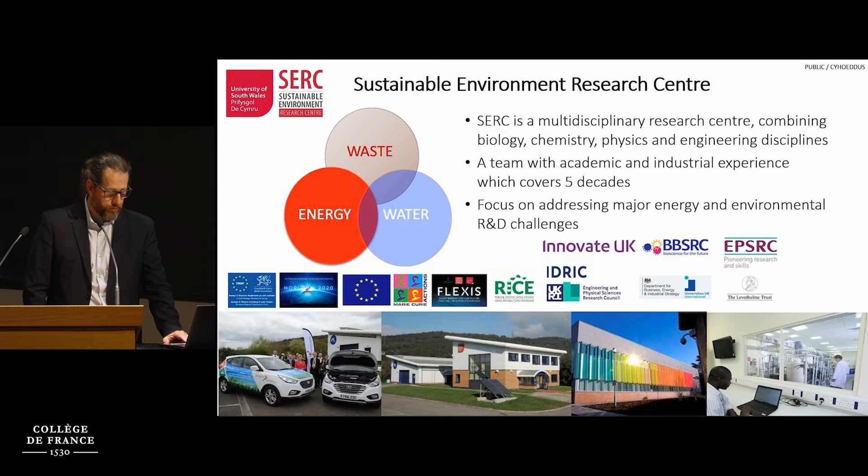We carry out mainly applied research, but we also have a lot of work in the hydrogen area, which I'm going to concentrate on today. And you'll see there we've been very lucky over the years to be funded through the framework programs. So from 1991, and most recently we've just been funded on a program with SNAM, which is entitled H2 Shift, which I will talk about later in my presentation.

Okay, so this is the Hydrogen Research Centre. It's situated at Port Talbot. And this was a fairly unique building. Back in 2008, we built this, and it generated hydrogen from PVs, and we've been refueling vehicles since then.

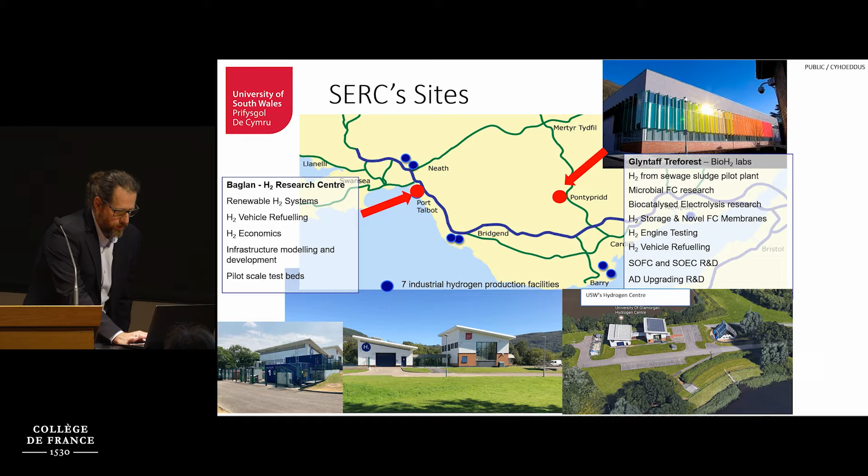It's rather difficult to. Oops.

So today I'm going to talk about the role of hydrogen in a low carbon future, and I'm going to talk about that in the perspective of the region that we're situated, and then in the UK, and some funding opportunities that I think are relevant for our collaboration going forward.

So hydrogen, we know, is the most abundant element in the universe. It's all tied up in molecules, water, hydrocarbon, biomass, so we're going to have to extract this hydrogen from these molecules if we're going to use it. Although recently there's been developments, which I'll talk about right at the end, which may mean that we can actually mine hydrogen in the future.

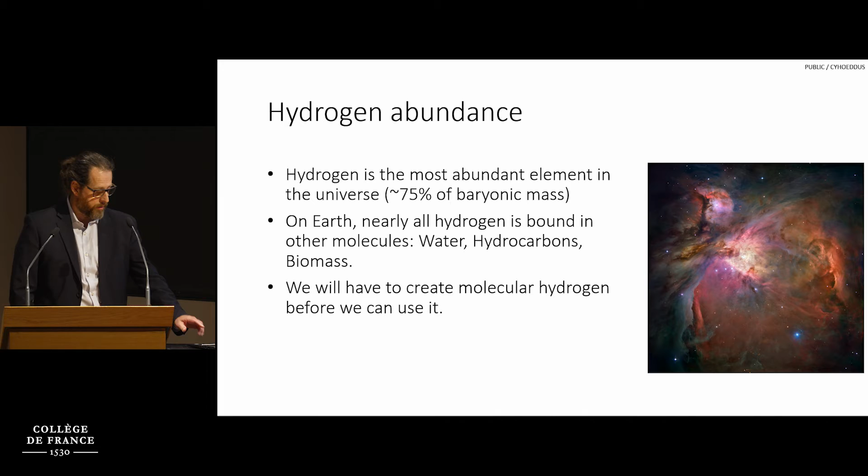And what makes hydrogen a good energy vector? Well, it's got the highest energy content per unit mass of any chemical fuel. It burns and produces no pollution, just water. It's got a heating value that is 3 times greater than any hydrocarbon fuel, and it can be produced from a variety of sources.

We've heard already about nuclear power and how we use those electrons to produce hydrogen, but also natural gas, which is where hydrogen is mainly produced these days. Over 98% of the hydrogen produced is through natural gas steam methane reforming. Biomass, and of course renewable power such as solar, wind, and hydro power. They can all be used to produce hydrogen.

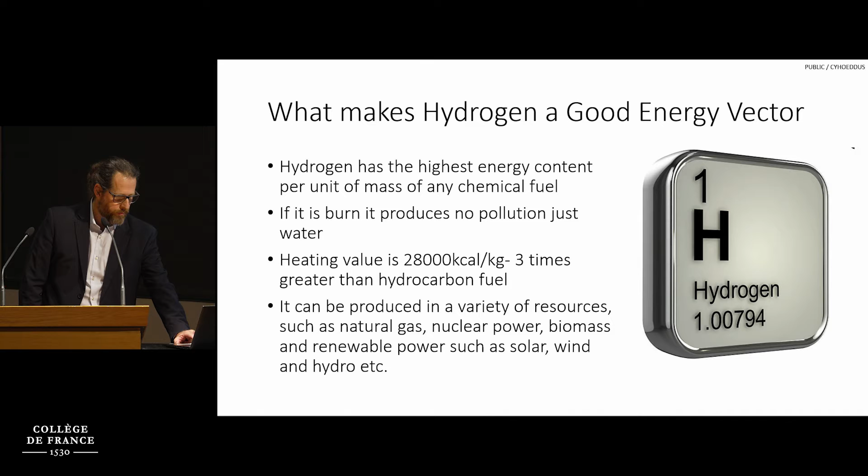And some years ago, I was part of the team that generated this document for the Royal Society, looking at the various low-carbon routes to hydrogen at scale, and it's still relevant today. The insights are worth a look. And the schematic there on the right shows the various sources of energy that can be used and the end-use technologies, including heavy industry, heating, transport, agriculture, and ammonia will play a very important part in hydrogen use in the future as well.

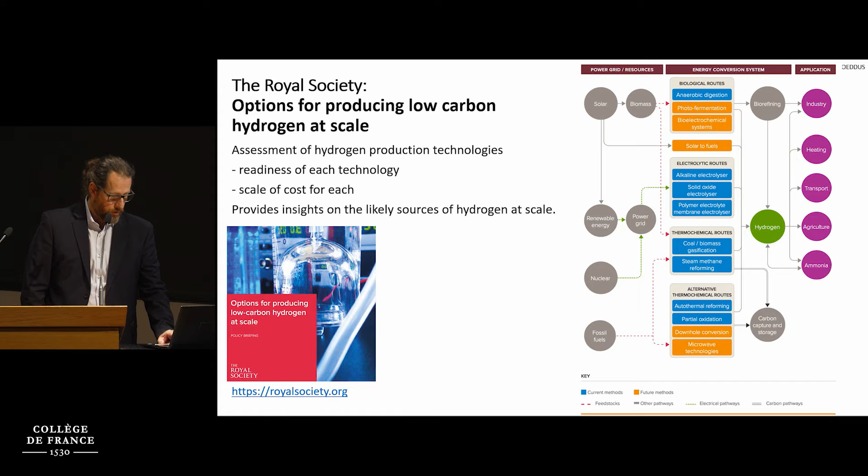So there are a number of ways in which hydrogen can be made, and they've been given various colours. I'm not particularly in favour of that colour coding, but if we quickly go through them. So brown hydrogen is through the production from coal. It can be called black hydrogen as well. Grey is through steam methane reforming. As I said, the majority of the hydrogen today is produced by this route.

Blue hydrogen is through steam methane reforming, but with the capture of that CO2, so either capturing it and storing it in geological structures, or you can use it, as we've seen just in the previous talks, in chemicals. And turquoise hydrogen is a similar way in which methane is pyrolyzed, but instead of needing to capture the CO2, we have carbon as a solid.

And we mentioned already pink hydrogen from nuclear power, and obviously the green hydrogen, which is the main focus of attention these days, is to green our hydrogen production from renewable energies. And yellow hydrogen is emerging forms of hydrogen such as direct solar power electrolysis. And as I mentioned, there is an opportunity to mine hydrogen in the future, possibly, and this has been labeled as white or gold hydrogen.

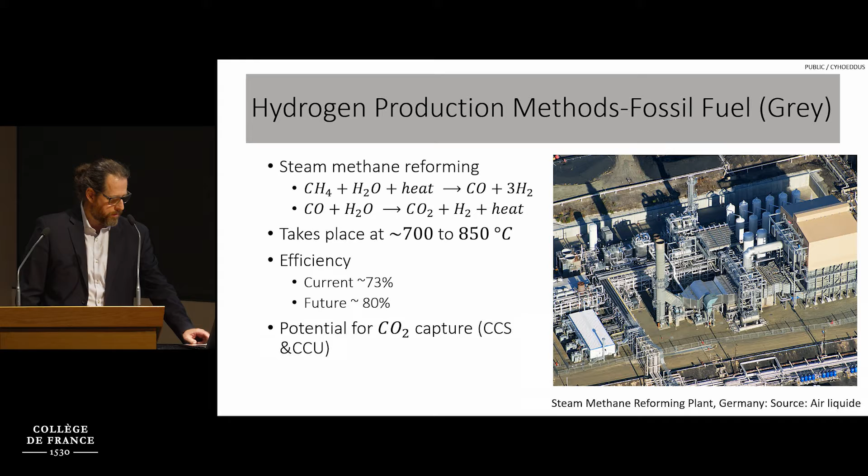So through electrolysis, with splitting of water, it's again a very tried and tested system. Technologies include alkaline, proton exchange membranes, anion exchange membranes, and solid oxide electrolysis cells. Their potential efficiencies range between 70 and 80%. The big advantage of these systems is that they're modular, so they can go from small buildings to large installations at megawatt scale. And the greenness of this hydrogen really depends on where these electrons come from, and that is the key.

I'll talk to you also about biological hydrogen production. This is potentially a negative route for production, negative carbon. And the one I'm focusing on here is anaerobic digestion. This is a technology that's been established worldwide. It actually accounts for 5% of the natural gas consumption in Europe, so a considerable amount. And the conversion technology here uses technology that's already in existence.

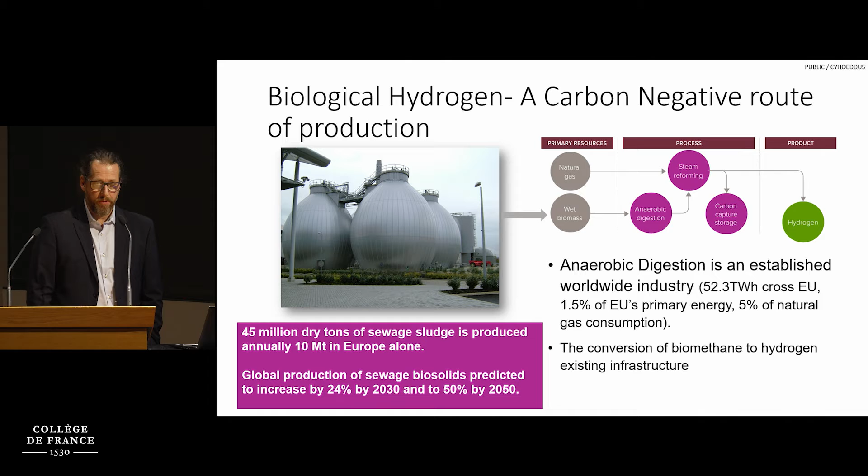And we've been working on these technologies for the best part of 2 decades at our group, and we've looked at splitting the technology into 2-stage AD systems, where we make biohydrogen in the first stage through Clostridia. That bacteria breaks down these biomasses into CO2 and hydrogen, making carboxylic acids or volatile fatty acids as an intermediate. These are then fed to an anaerobic stage methanogenic reactor, which is fine-tuned just to make methane. That methane and CO2 is then taken to steam methane reforming, and hydrogen is then produced.

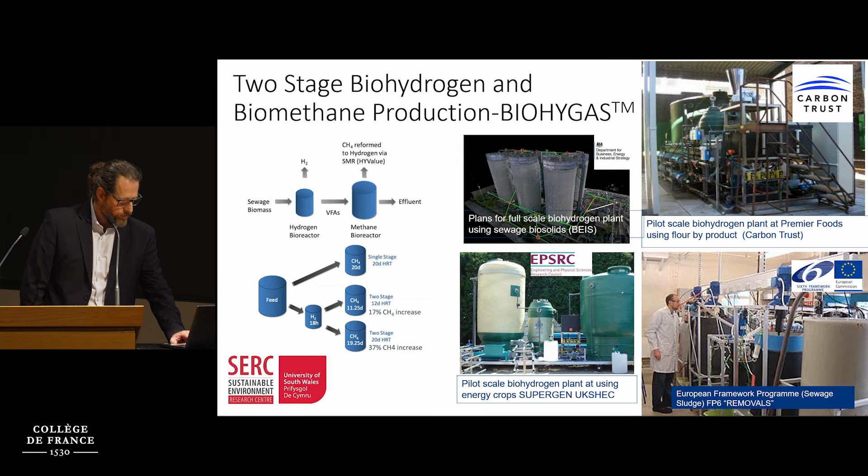So how can hydrogen help build a climate resilient society? Well, it's a really complex question to ask. It's an interconnected answer. Undoubtedly, hydrogen will play a massive role in decarbonizing power systems, because when the sun isn't shining, you need to capture that energy. When the wind isn't blowing, you need to store that energy somehow. And hydrogen is certainly going to play a role in that.

Obviously, with transportation, in recent times, battery electric vehicles have really stolen the march over any hydrogen vehicles. There have been a few in Wales and across the UK, but I think hydrogen will figure in transport at HGV levels and larger vehicles that need to go further distances, and also in the production of heat. And this is something that is a really hot topic in the UK at the moment.

Most boilers are configured to be able to utilize up to 20% hydrogen, so even a small amount of hydrogen into the existing grid can be used at the moment, but at 20%, that would be a huge production of hydrogen. And then, of course, hydrogen would be used significantly in the difficult industries to decarbonize, such as cement and steel.

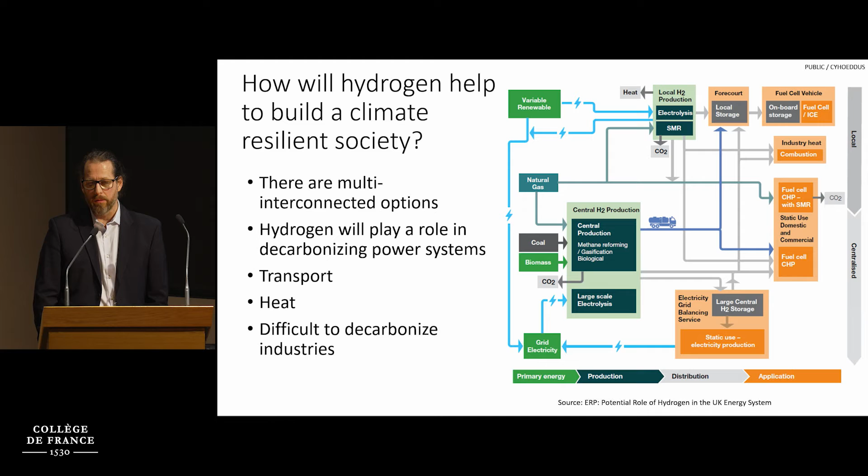And in Wales, we've been lucky enough to be part of the City Deal. It's a nearly £60 million programme run by the local council, Neath Port Talbot Council, along with our colleagues in Swansea University. And of that, there's about a £2 million capital fund. There's a hydrogen stimulus project, and this utilises photovoltaics on this building. To your right there, there's a new council building, and when the building's not using the electrons from the photovoltaics, they will be transferred to the hydrogen centre where we will refuel vehicles.

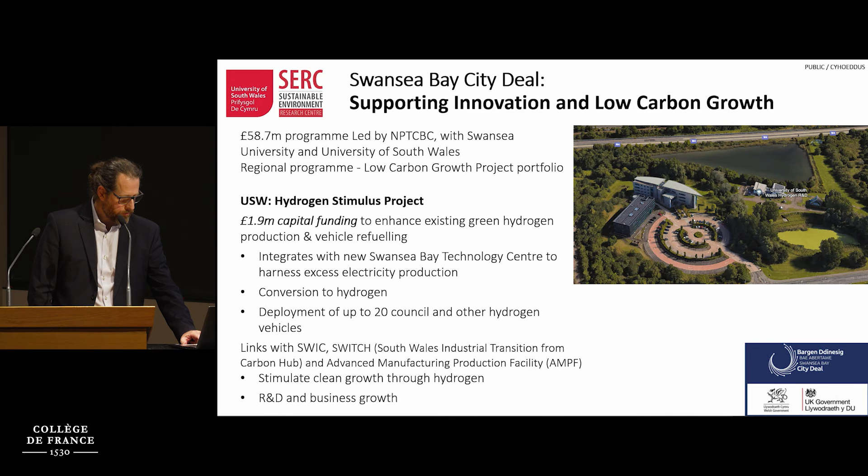And we're working closely with the South Wales Industrial Cluster, which we're the academic leads for, and a newly funded project called Switch, which is about buildings as power stations. And the South Wales Industrial Cluster is a good example of how hydrogen can play a significant part in a region.

Along the South Wales coast, we have a lot of companies that are emitting huge amounts of CO2. In total, about 16 million tons of CO2 per year is emitted. And we have all these companies now as part of a consortium where we're working with them to look at all the different ways in which we can decarbonize their industries. And hydrogen plays a significant role in that.

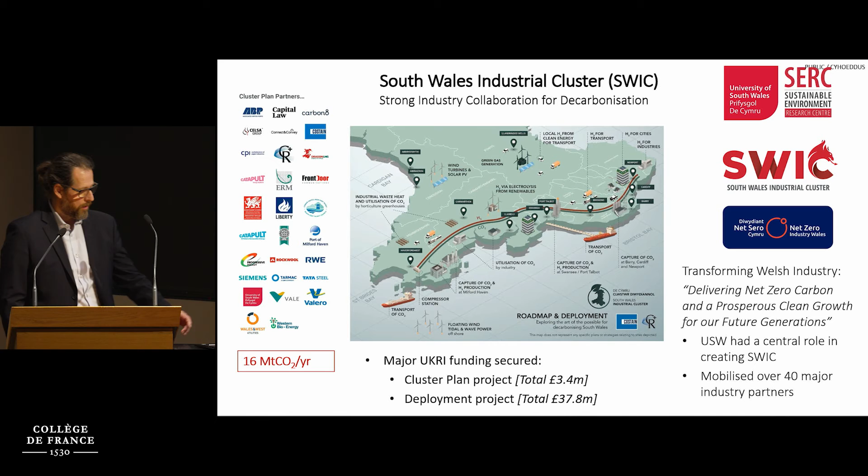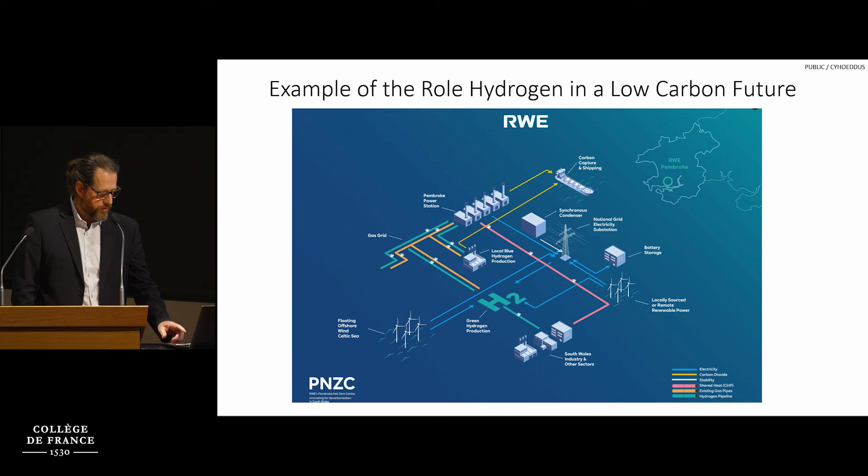And a good example of one of those projects is a project that RWE are building, looking at offshore floating wind to produce renewable hydrogen, green hydrogen, incorporated into the gas grid system through steam methane reforming and capturing of the CO2 compressed into shipping, and then those ships are taken up to regions where there is carbon capture storage, because in and around the South Wales coast there are no such geological structures to be able to store that CO2. And this South Wales Industrial Cluster is just one of these industrial clusters in the UK.

There are 5 others, there's 6 in total. And the funding for the IDC programme is nearly £500 million, so it's not short of money. And the industries have bought into this in quite a big way and are matching that funding. And you'll see that the South Wales cluster is about the second largest. The size of the circles denotes the amount of CO2 emitted in these regions.

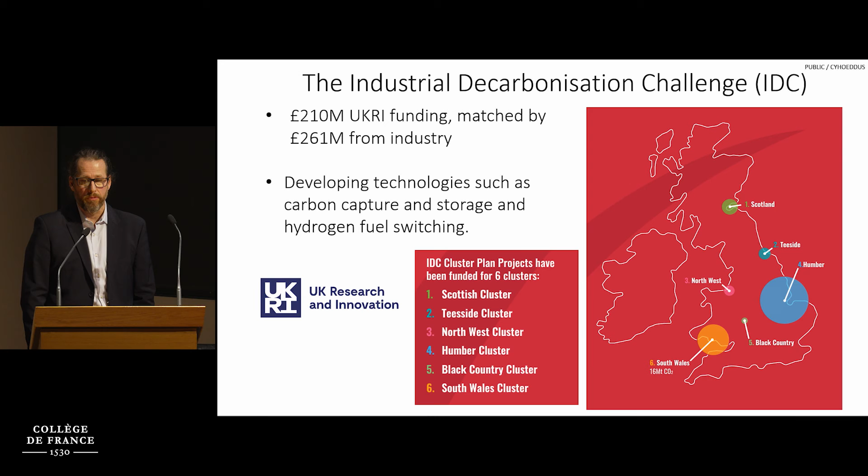And unfortunately for South Wales, this circle is going to reduce in size because Tata Steel have just announced that they're shutting 2 of the blast furnaces, which constitute 15% of the CO2 from the region and 2% for the whole of the UK. So it's a real significant blow for that region. But one might argue that it saves a lot of CO2, not so good for job prospects and the economy, however.

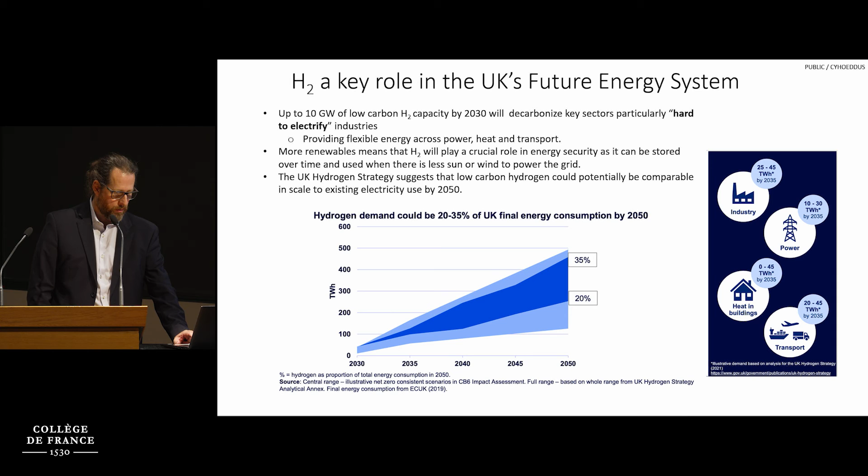The UK Hydrogen Strategy is predicting that by 2050 low carbon hydrogen could actually be at a potential level comparable to electric generation currently. There's a big margin of error there, but you can see that that prediction, and it is only a prediction, does show that there's going to be a rapid need for hydrogen production to decarbonize industry, power, heating in our homes, and of course transport, not least aviation.

And in the UK, the research councils have been very proactive in setting up new hubs, good for collaboration in the context of our collaboration with European partners and France. So there's 2 main centres that have been funded last year, HI-ACT and UK-HyRES. HIACT is looking at the integration aspects of the energy transition, whereas UK-HyRES is looking at production, storage, end use, safety, and environment issues as well.

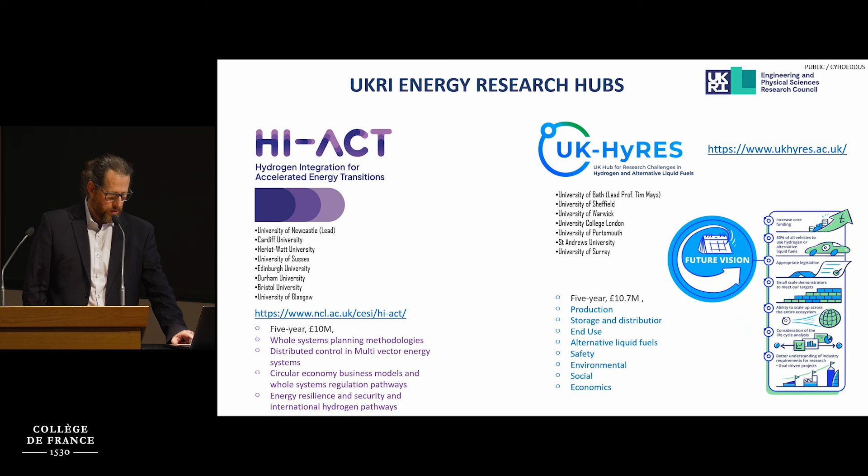Both those projects are £10 million or so over 5 years, and they have been 50% matched with industry funding. So again, a very strong commitment from industry in these research projects. Another program that has been launched recently is the Place-Based Impact Accelerator Accounts, and we at the University of South Wales are involved in 2 of these. I think there's 6 in total.

One that I mentioned already, Switch, which is looking at buildings as power stations, and hydrogen will figure significantly in that program. It's a 4-year program with £4 million worth of funding, and again, a 50% match from industry. And GW-SHIFT, led by Bath, is the Great Western Supercluster of Hydrogen Impact for Future, rather grand name. But again, that's looking at production, hydrogen storage, conversion and transport.

I did mention that we were asked to highlight any European funding from the framework program. We are involved in H2 Shift. The lead company is SNAM. There's 13 partners across 6 European countries looking at advanced electrolysis, biohydrogen and direct solar hydrogen production. We're hosting Protium's electrolyzer development as an open test bed.

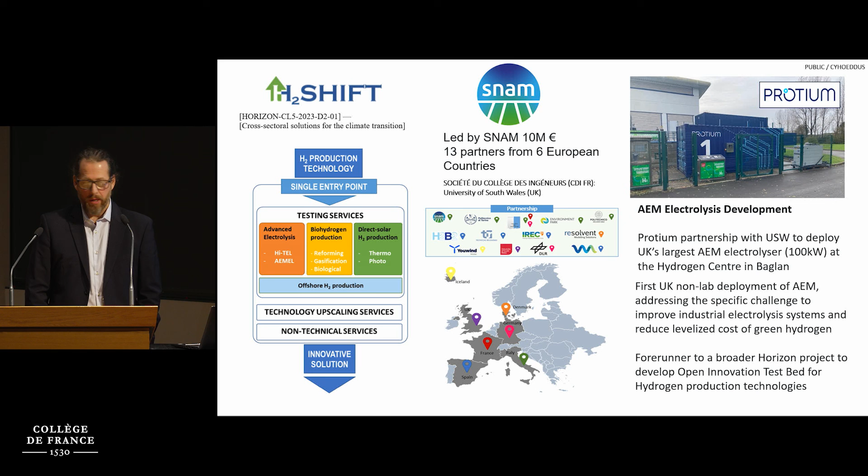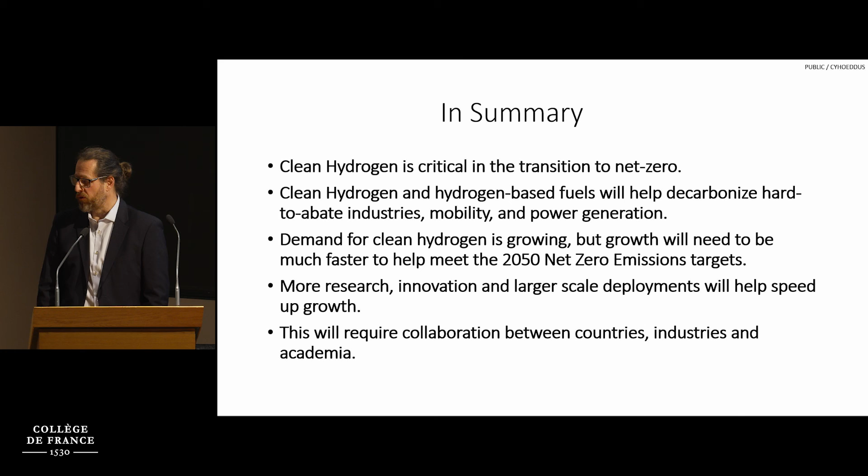More research, innovation, and larger scale deployments, not demonstrations, will help speed this up, and we've seen some of those in the region that we're working in. And luckily, this all needs collaboration between countries, industry, and academia.